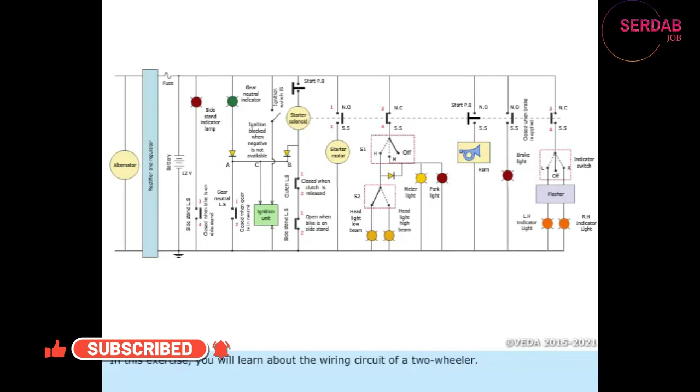In this exercise, you will learn about the wiring circuit of a two-wheeler. The electrical circuit of the two-wheeler is shown.

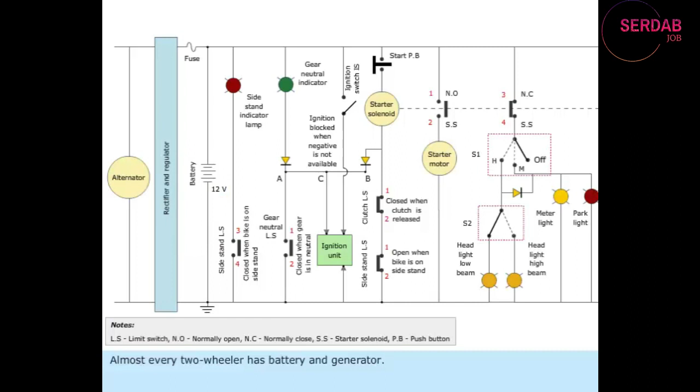Mostly, every two-wheeler operates with 12-volt DC supply. Almost every two-wheeler has a battery and generator. The negative terminal of the rectifier output and battery are grounded to the metal body of the two-wheeler. This is called negative grounding.

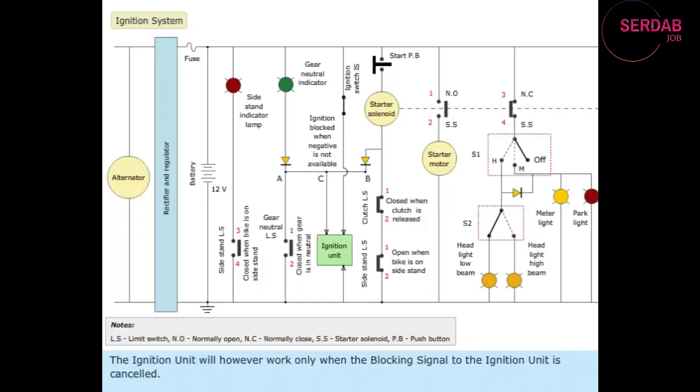Ignition system. The ignition system of the two-wheeler is controlled by the ignition switch, IS. When the switch IS is turned on, the ignition unit gets supply. The ignition unit will however work only when the blocking signal to the ignition unit is cancelled. The blocking signal is cancelled only when direct positive is not available to the ignition unit control point C.

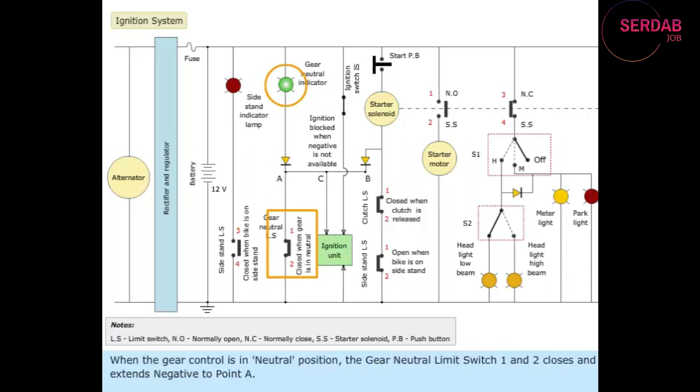This occurs under the following conditions. When the gear control is in neutral position, the gear neutral limit switches 1 and 2 close and extend negative to point A. This removes positive from point A and hence from ignition unit control point C.

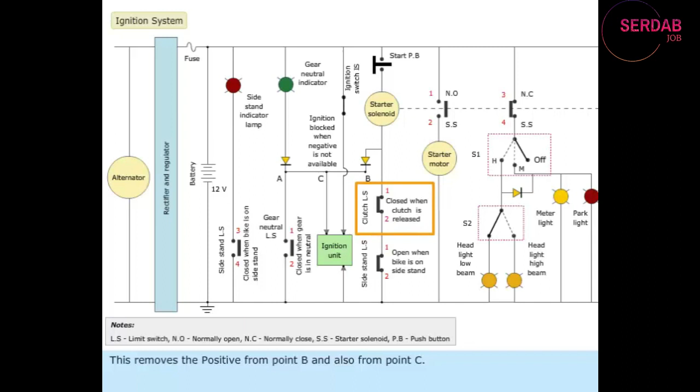When the clutch is in released position, the clutch limit switches 1 and 2 close and extend negative to point B. This removes the positive from point B and also from point C. This sequence happens when the side stand limit switches 1 and 2 are also in closed condition. This closes when the two-wheeler side stand is in released condition.

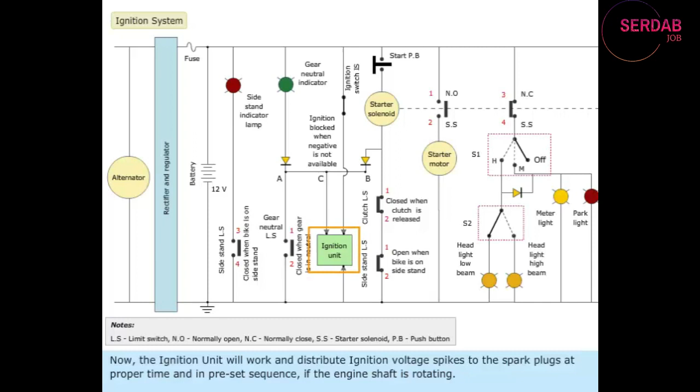Now, the ignition unit will work and distribute ignition voltage spikes to the spark plugs at proper time in preset sequence if the engine shaft is rotating. Improper functioning of the distributor results in poor engine performance.

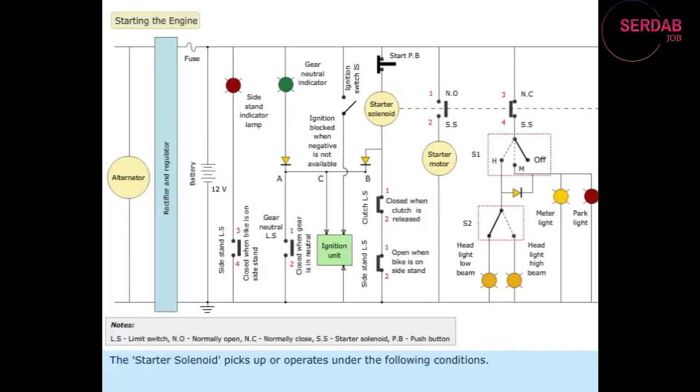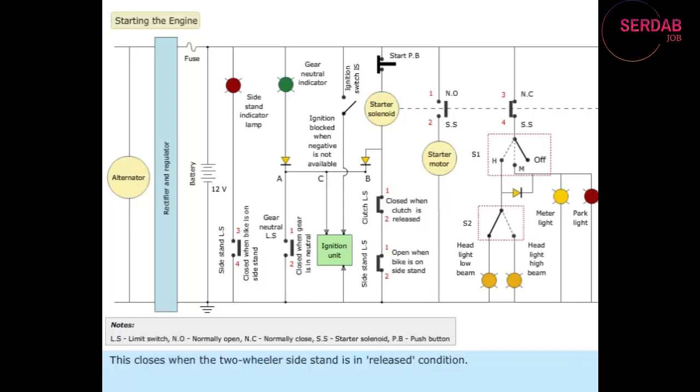Starting the engine. You will have to press the Start push button, PB, to start the engine. The starter solenoid picks up or operates under the following conditions: when the clutch is in released position, the clutch limit switches 1 and 2 close, and also when the side stand limit switches 1 and 2 are also in closed condition. This closes when the two-wheeler side stand is in released condition. Under these conditions, the starter solenoid SS picks up.

Now, the 1 through 2 normally open (NO) contact closes, extending positive supply to the starter motor. The motor runs and starts the engine.

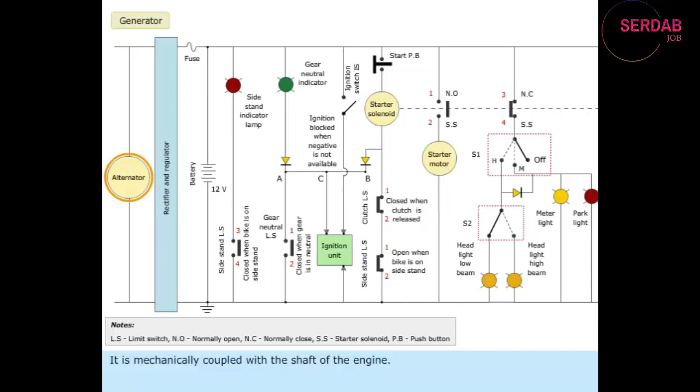Generator. Now let us see how the power is generated. The generator can be a DC generator, or it can also be an alternator, as in our case. It is mechanically coupled with the shaft of the engine. The alternator produces AC power, which is rectified, regulated, and then fed to the load and to the battery for charging.

Details of other loads. The other electrical loads in the two-wheeler are headlights, park lights, brake lights, side indicator lights, horn, and so on. The rider can control the usage of any load through the switches provided.

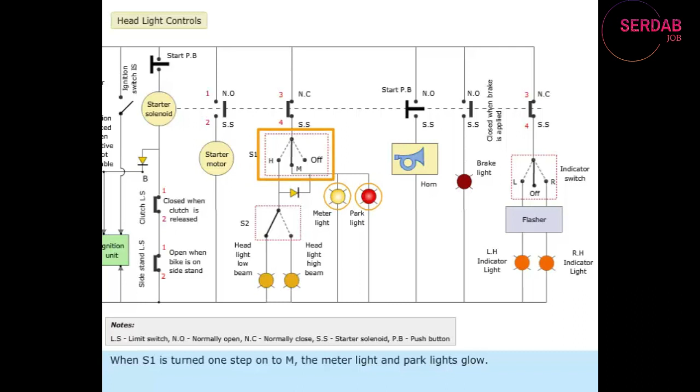Headlight controls. There are two switches in series. The first switch is S1, which has an off position. When S1 is turned one step onto M, the meter light and park lights glow. When S1 is turned to the next step, H, the headlights work.

The second switch, S2, has two positions. When the low beam position of S2 is pressed, the low beam light works. When the high beam position of S2 is pressed, the high beam light works.

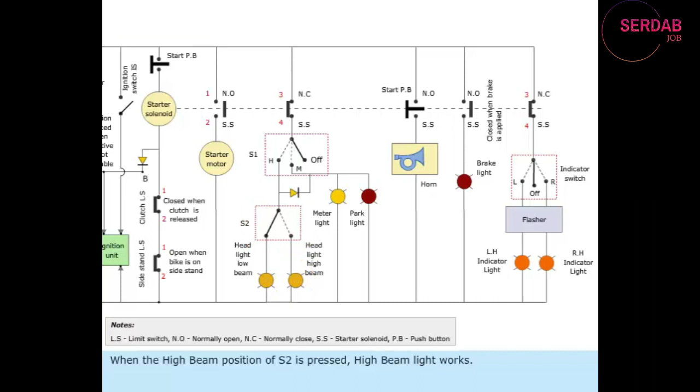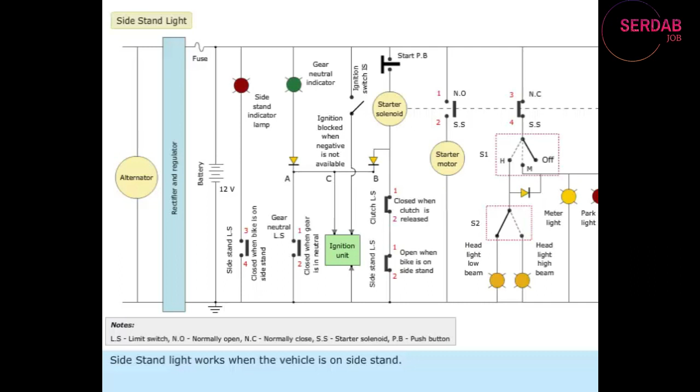Side stand light. The side stand light works when the vehicle is on the side stand. This light circuit operates through the side stand limit switch contacts 3 through 4.

Gear neutral indicator. The gear neutral indicator works when the gear is in neutral position.

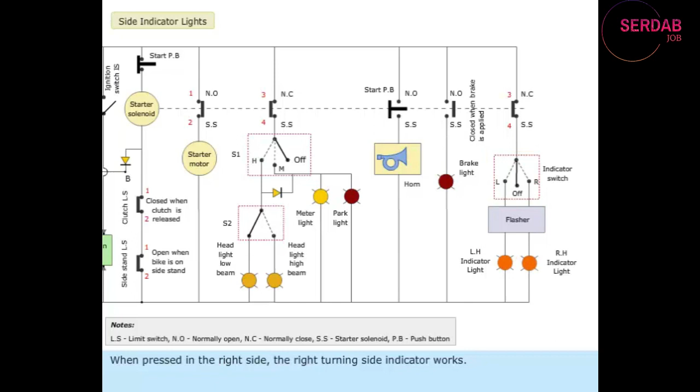Side indicator lights. The side indicator lights are controlled by one switch with 3 positions. The middle position is off. When pressed to the left side, the left turning side indicator works. When pressed to the right side, the right turning side indicator works. The side turning indicator lights are controlled by flashers to give flashing lights.

Brake light. When the rider applies the brake on the brake pedal, the brake switch is closed. It energizes the brake light and hence the brake light will glow.

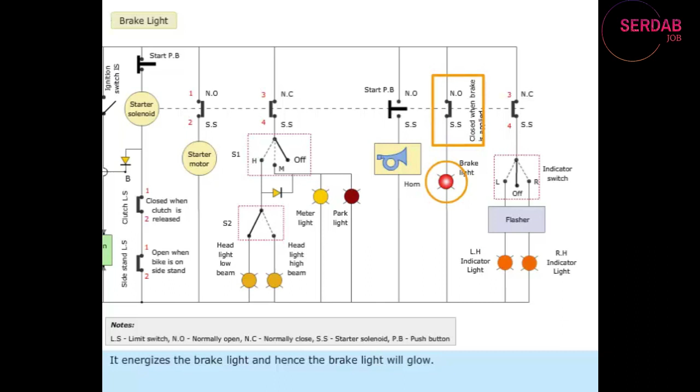Horn. When the rider presses the horn switch, it completes the circuit for the horn. Hence, the horn sounds.